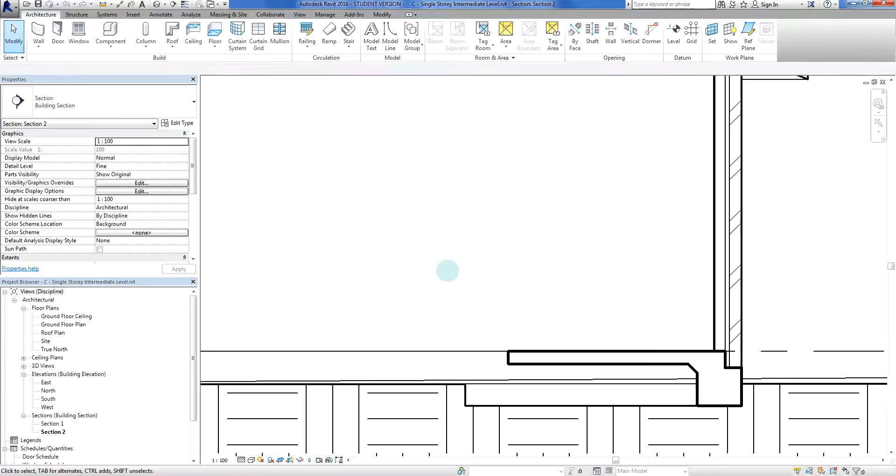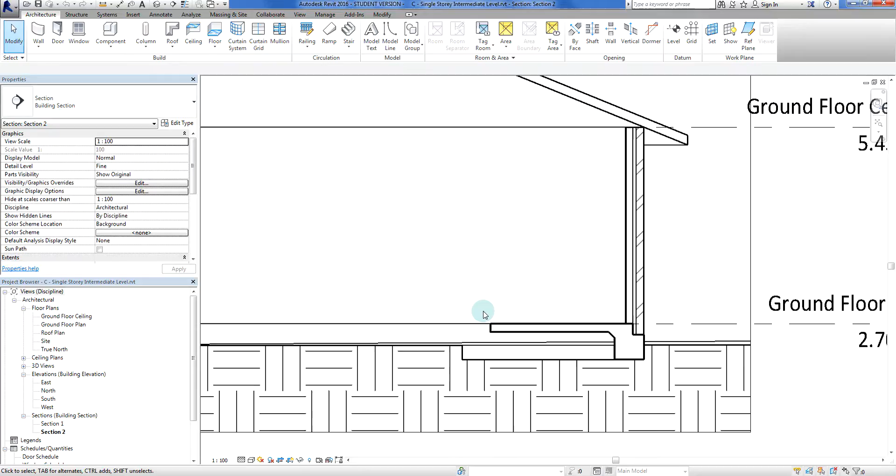In the last couple of videos you've heard me ramble on about a couple of different options with regards to getting floors down, and in particular looking at how we deal with this issue with brick veneer walls.

So what I'm going to do is choose an option today, and it will not be the perfect option, but it's an option that we can clean up at a later date. That's what we're going to do.

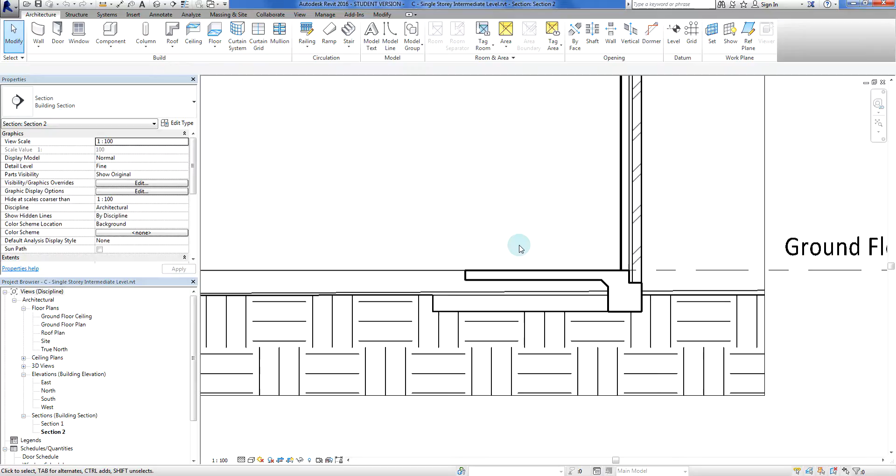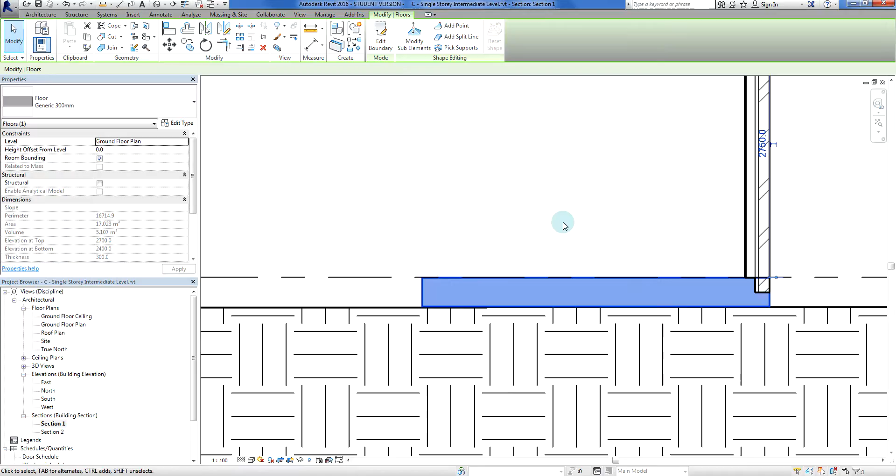First things first, what I'm going to do is just delete some of this other rubbish. I'm going to select that pad there and delete that. Just going back to my section 1 here, and I'm going to delete that as well. So now we are back to where we were before.

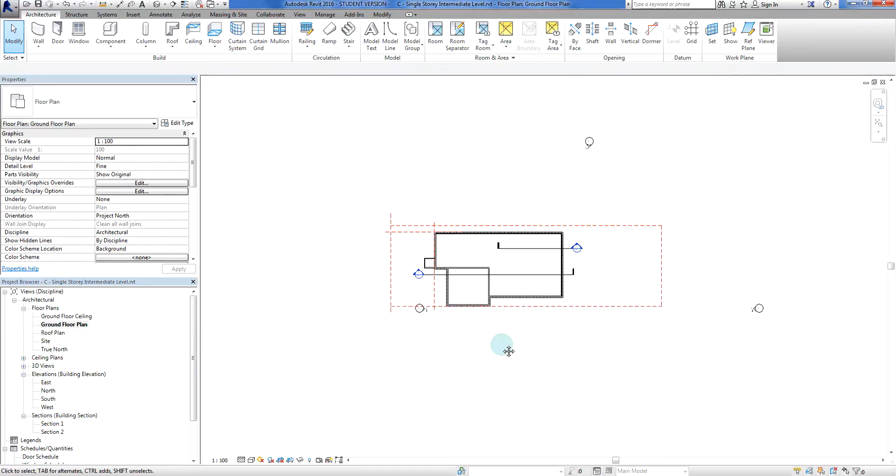If I have a look at my 3D, I would expect to see that right now, but we're pretty clean again. There's no floors or anything like that to get in the way. So the option that I'm going to choose, get rid of, yes, I do want to get rid of that section.

The option I'm going to choose is to place a concrete slab all the way around, and it's going to be in line with the timber framing. I'm not going to worry about the brick at this stage, and there'll be some rationale behind that. We'll have a look at that later on.

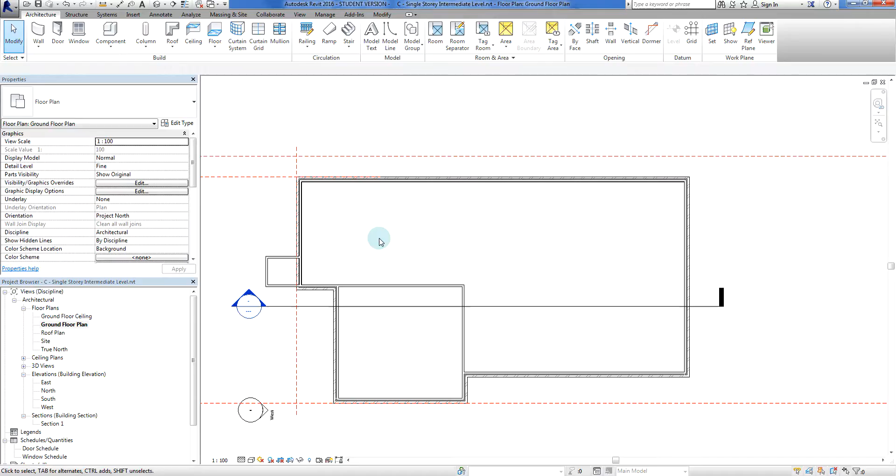First step, we'll go Architecture, and I'll go Floor, floor architectural. Let's have a look at my floors here. Okay, in situ concrete, let's have a look at that one there.

Edit the type. Edit. Okay, this one's no good for us. Let's go back to our generic 300.

What we're going to do is just create a new floor here, so we will duplicate this. I'm going to call this concrete floor 310 millimeters. In Australia we deal with waffle rafts, and 310 is a fairly generic thickness that we'll use. So let's use that one there.

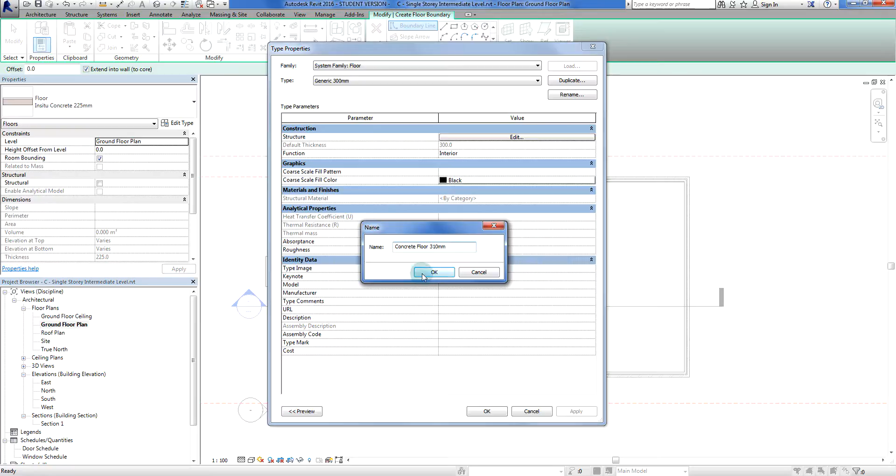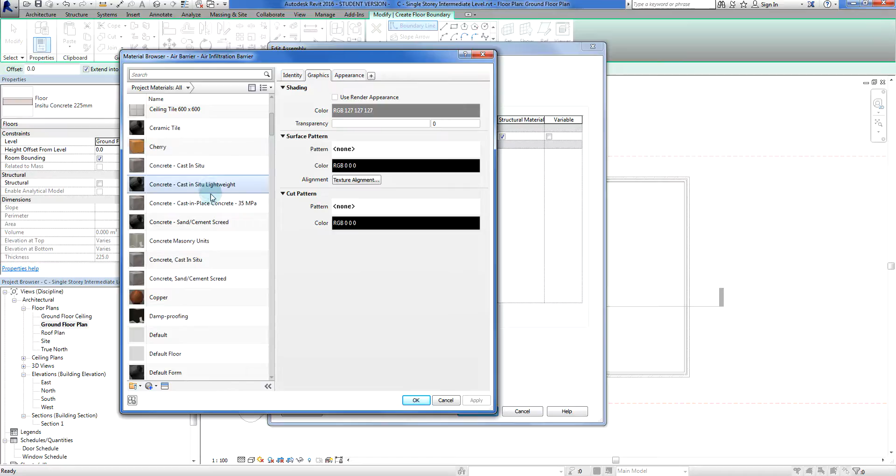Structure, we're going to go in there, I'm going to edit that. I'm going to change the material, so click on where it says by category, click on that little thing there, which takes us into the materials browser, and in the project materials we'll have one in here that is like concrete cast in situ, absolutely perfect for us.

We'll apply that. Remember, we just want to make sure that our floor thickness matches the name of what we want, so there's some correlation there. So there we go, concrete floor 310 millimeters, default thickness there 310 millimeters, so we're in the right place. Now we're going to go OK.

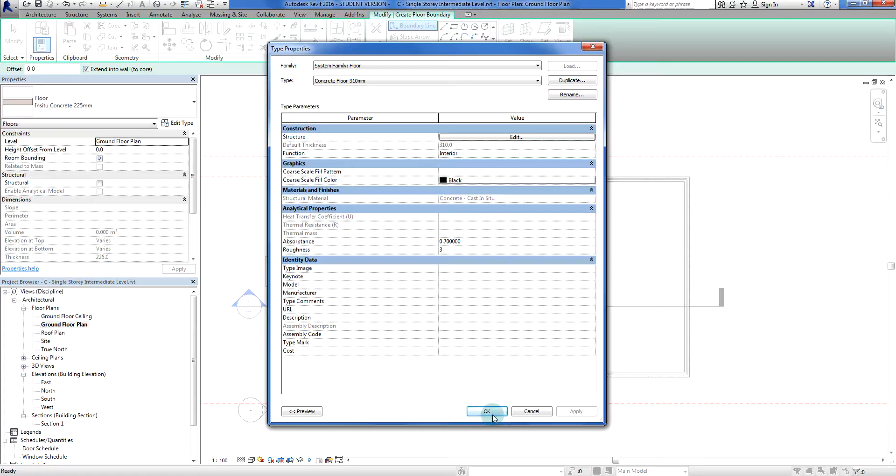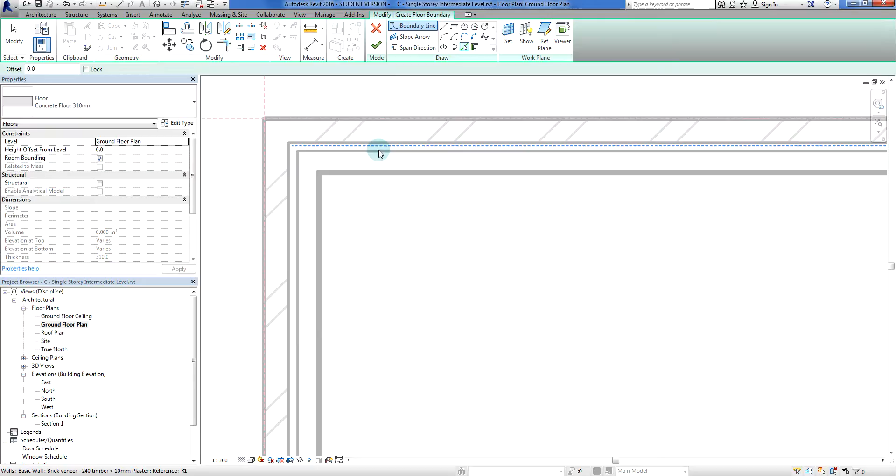First check here, are we at the ground floor level? Yes we are. Right, so now what we can do is start drawing the walls in. Now important thing to note here, actually I'll use my pick lines tool.

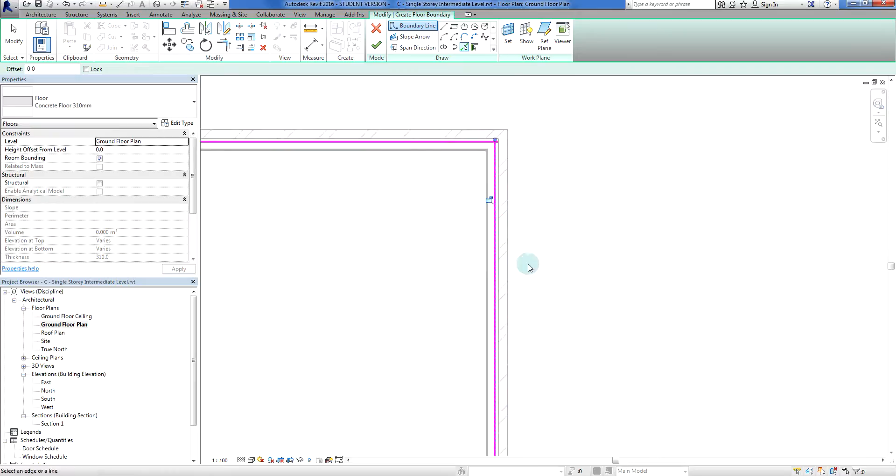I'm hovering over here, it hasn't picked up the lines, but if I tap the tab key, there it is. This is the outside edge of the timber frame. That's what I want to do for this particular job, so I'm just going to click on that, and I'm going to work my way around. There we go. Don't worry about those little overhangs, we can trim all that out later on. Tab, tab.

Now this concrete floor here for the garage will be lower than the other one, so we need to bypass that at this stage, and I'll pick this one here.

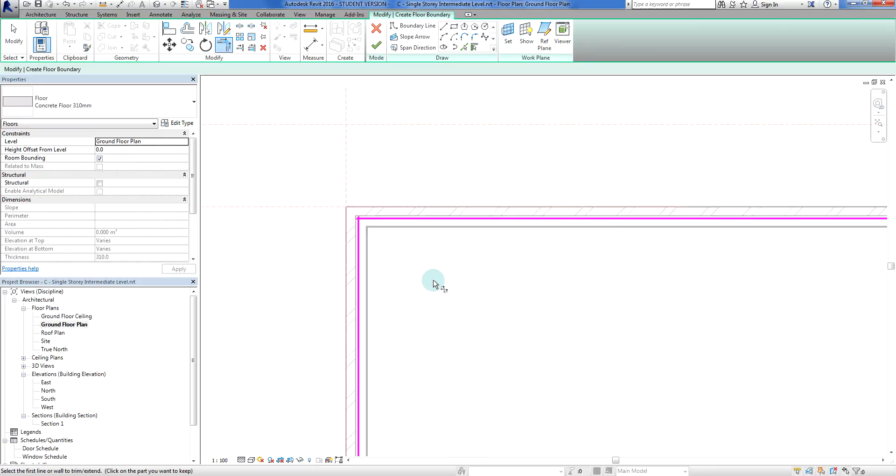So what I can do here is use my trim tool, or trim and extend tool. I'll trim those two lines together: pick one line, pick another, go to the other corner, pick a line, pick the other. With these little overlaps here, Revit's not going to let us finish the sketch, so we've got to go in and clean all that up.

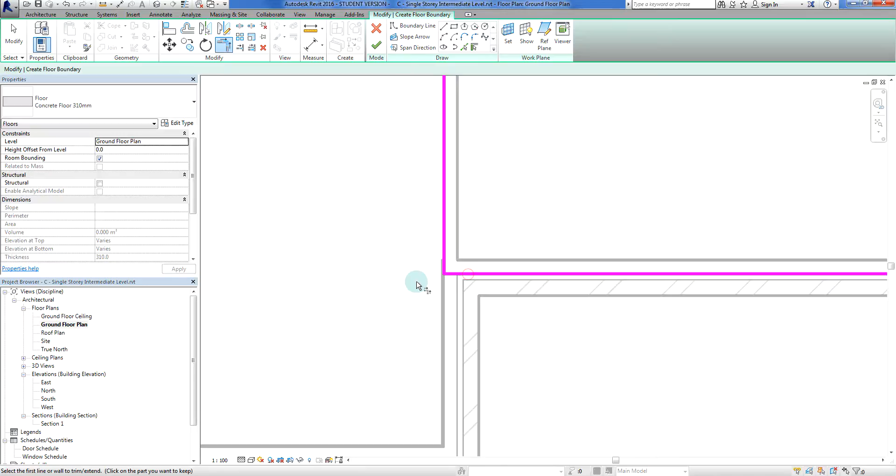Here Revit can't finish the extrusion because there's a hole in it, so again using the trim tool to resolve those little issues. So that's that floor done.

Now if I click the check mark, physically we're not going to see an awful lot different, but straight away what I'm going to do is repeat this process while we've still got time.

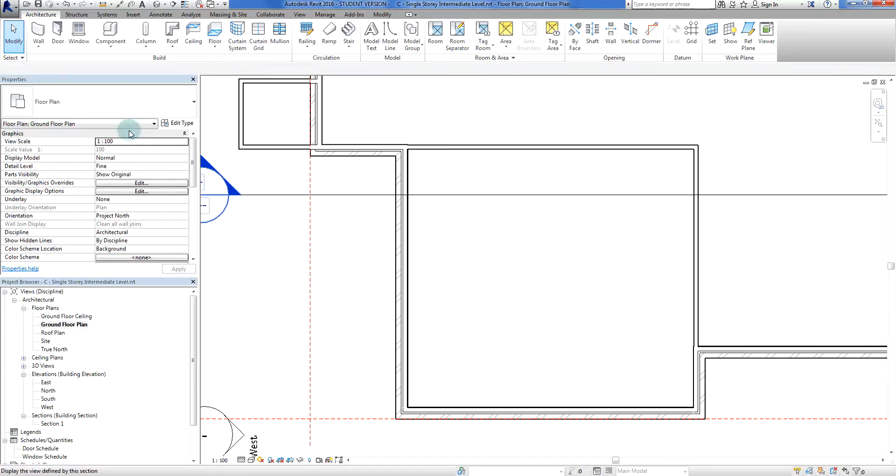So, floor, architectural. This time I'm going to change the level of the ground floor of the floor. Now at the moment we only have the ground floor plan, but the garage will typically be in the range of 50 to 100 millimeters below the ground floor, so about one step.

I tend to, if we're dealing with brick veneer, like to make my life a little bit easier for the brickies. So I will go minus 86 millimeters. The reason for that - a typical brick is 76 millimeters high, plus 10 mil mortar, one brick course plus mortar. We'll drop it down by 86 and apply.

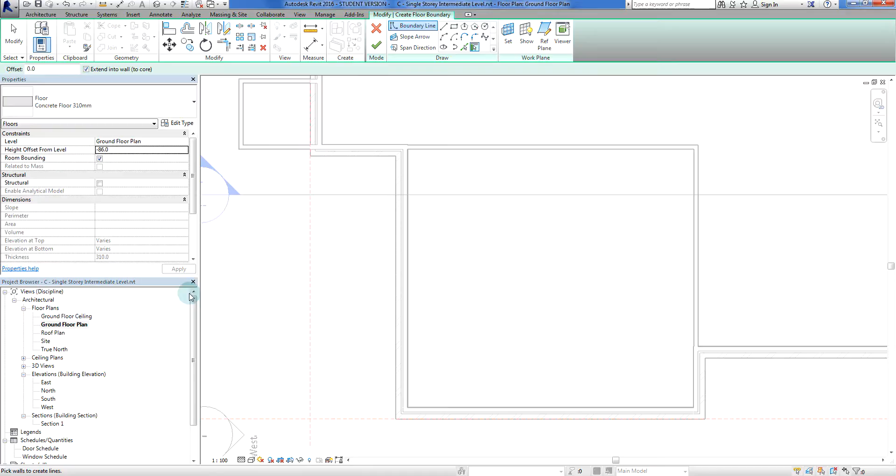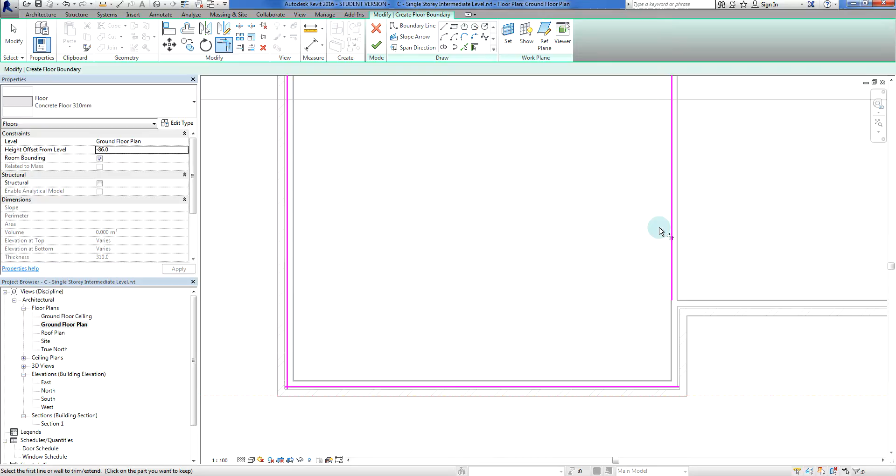Again we're going to use the same pick lines tool, and tab our way through that, tab our way through this. Use our trim command - I just typed in TR - and trim those two, trim those two.

That's not going to work for us because we've missed the timber frame there, so I'm just going to drag that out.

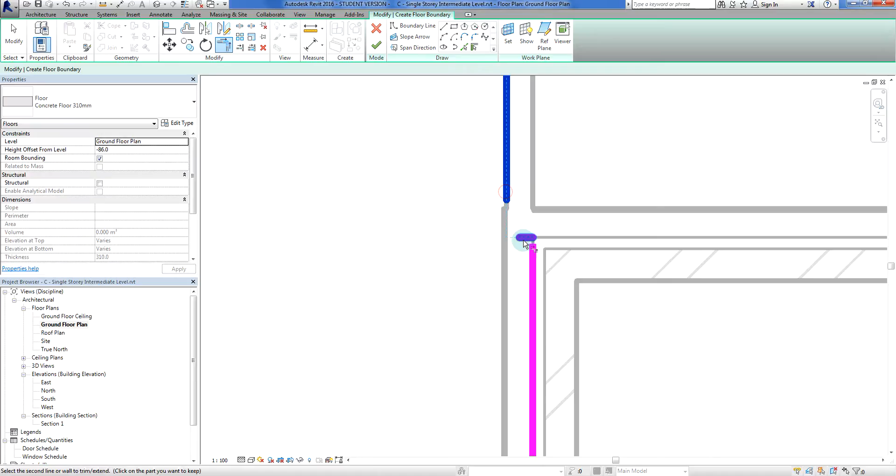This little point here becomes our job as building designers, or architects, if that's what you are. I'm just using my trim tool, line tools. We've got to tell the concrete maker that wall is higher, but this floor's got to be a bit lower. So they've got a little bit of work to do in their formwork, but that's fine - we'll design it, they'll build it. We'll finish that sketch.

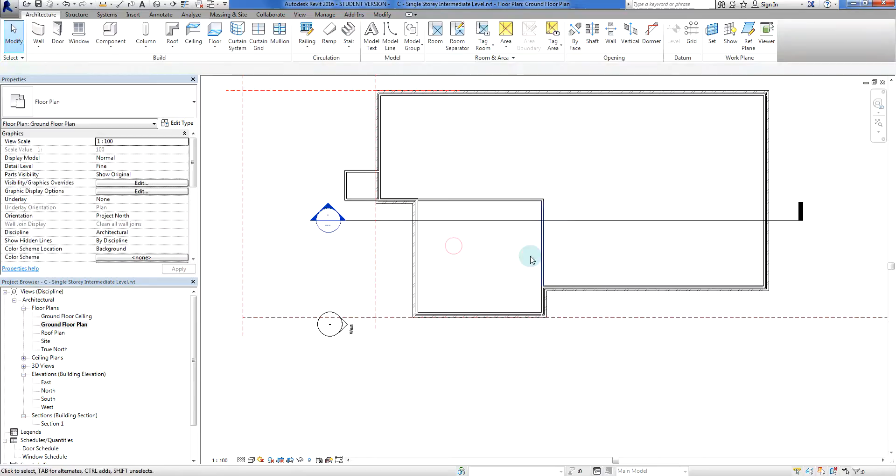Right, let's check our handiwork. Let's double click on the section, and voila, that's exactly what I was hoping for.

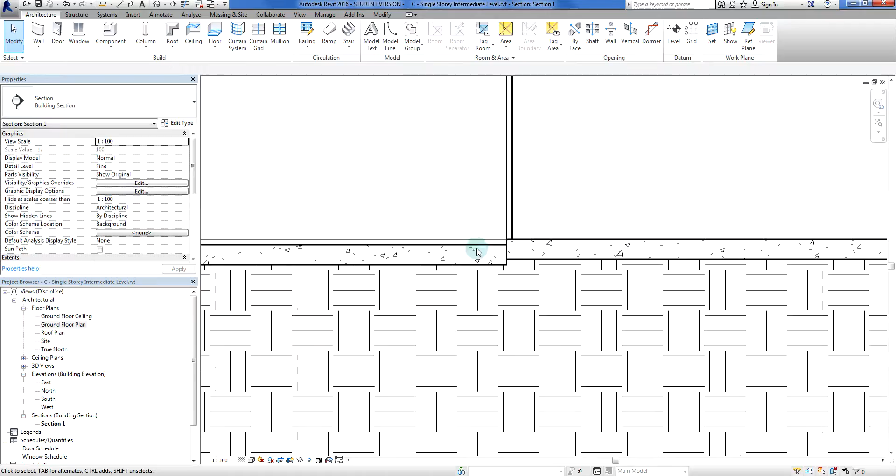So on the right hand side, we've got our floor there. We've got a gap in here, I'm not going to worry about it. We've got our 86 millimeter drop down here, and it goes to the edge of the garage. We've got a little bit of work to do there - actually, we could just drop this one down. Make our base offset here minus 86, minus 86. Apply that, see what happens. We can offset that - it still relates to the level, but it's just now offset by a certain height.

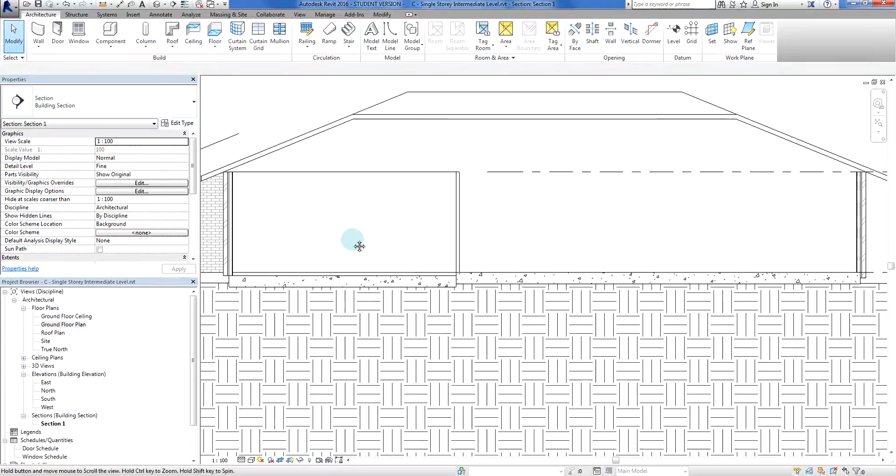So that's - I'm quite happy with the way that's gone. It's not perfect at this stage, I'm not intending it to be, but at least when we start cutting through our building in section, this little area is behaving itself, and this part here is behaving itself in the first instance.